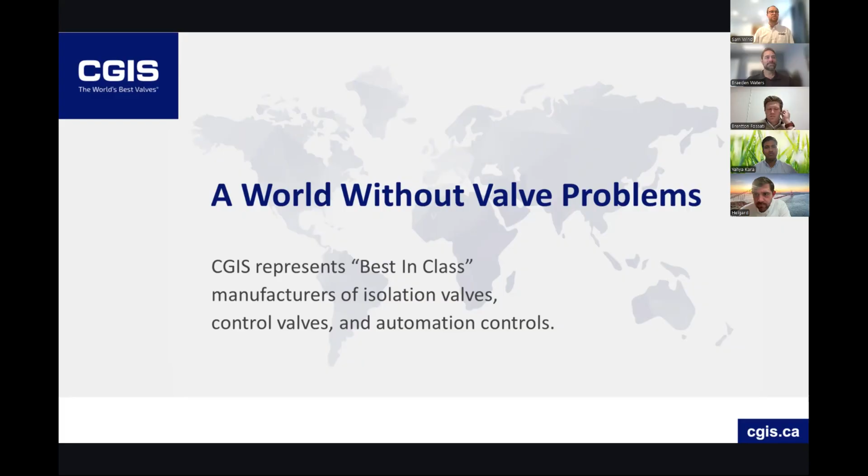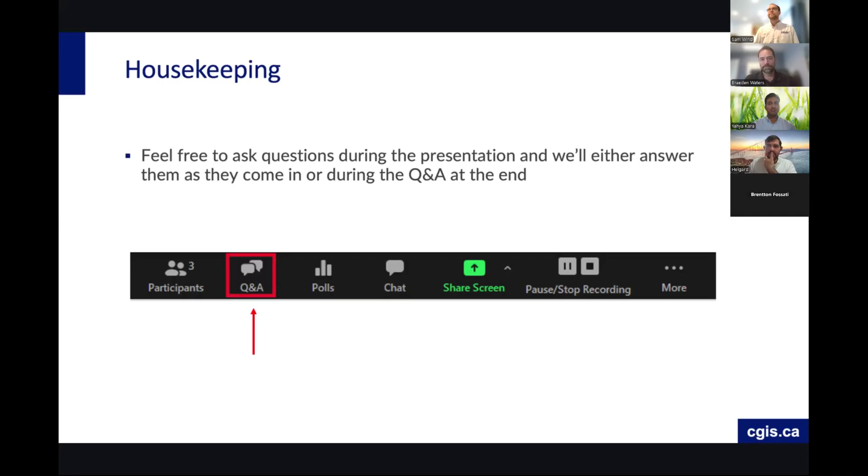Thank you very much, Sam, and good morning to everyone. First of all, to CGIS, Sam and the team, thank you for hosting this webinar. We appreciate the effort you put into arranging this, and we hope we can bring value to the table. Over the next 30 to 35 minutes, I want to talk about something that has quietly changed underneath our industry, which great many operations are still managing with the assumption of the late 90s. And that's water - not water as a utility, not water as a line item buried in the site services budget, but water as a thing that increasingly determines whether you can expand, whether you can operate, and in some regions, whether you keep your license. As mentioned, I am Brenton Fusati, and I'm the CEO of our African operations.

Let me be upfront about what this session is and isn't. It isn't a product pitch for the first 20-odd minutes. It is an honest look at 5 challenges that show up on almost every site we walk onto. Then, yes, we'll look at some of the solutions we've built to address them, and I'll show you real installations with real numbers. If my diagnosis sounds like your plant, we should talk. If it doesn't, hopefully you leave with a framework worth using.

So if we look at what we've prepared, we start with the landscape - what's actually shifted. Then the water reality: 5 challenges in order - water scarcity, tailings recovery, clarifier bottlenecks, rising treatment costs, and changes in regulation. Something people avoid discussing: what happens when you don't address these - the risk of inaction. And then the shift in how to think about water, the technologies, and a case study. We close with a call to action - what does that mean for the future?

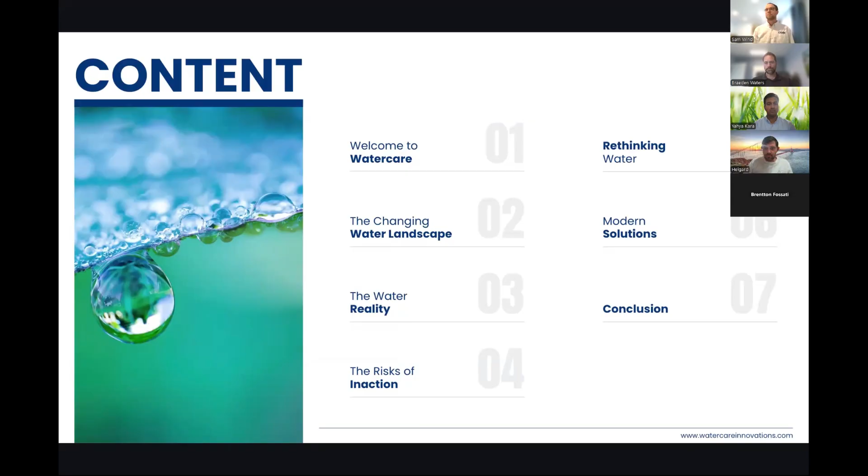So welcome to WaterCare, your comprehensive water treatment solutions provider.

Briefly, who are we? WaterCare Innovations started as a South African company with a dream just to solve the mining challenges faced in our local environment. We design, build, and operate water treatment systems throughout Africa, and recently we've expanded into the US market and now are trying to break into the Canadian market.

Our systems are primarily developed for the mining and heavy industry. We're not a chemical supplier who also sells equipment, and we're not an equipment supplier who also sells chemicals. We integrate the whole value chain, from agitation in the dam through degritting, clarification, and dosing of the right chemicals, and making sure the water chemistry is fit for the solution provided and developed, to dewatering and waste handling.

Our position is not just about water, it's about people. It's about the planet and it's about purpose. That reads like a poster. Here's what it means operationally.

When we walk a site, we're not looking for where to sell a clarifier. We're looking at where your water goes, what it costs you at every stage, and where it's constraining you. Sometimes the answer is equipment. Sometimes the answer is that you're dosing chemicals at a problem that is fundamentally hydraulic, and no amount of flocculant will fix that. That's the lens for everything that follows.

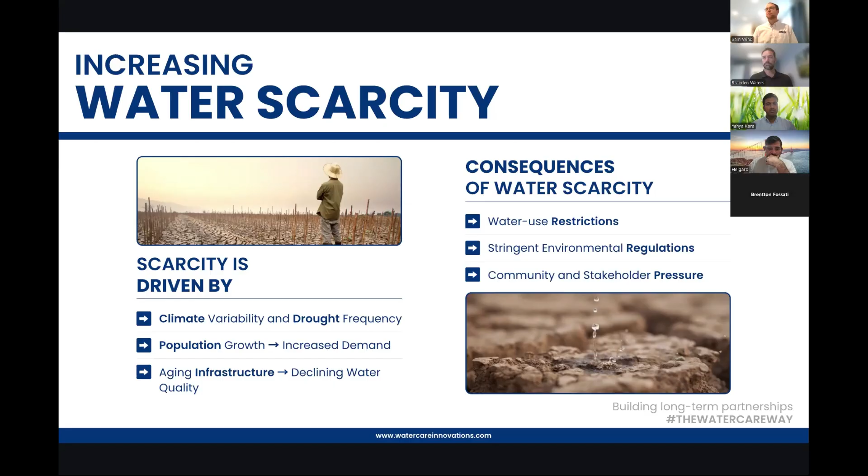The water reality. What are the key water challenges? 5 challenges. Let's take them in order.

Water scarcity, challenge number 1. The mindset problem first. Historically, water was a readily available resource. You budgeted for it the way you budget for compressed air. It was there. The engineering question was how to get it out of your process safely and cheaply.

The realization, and for many operations that has been genuinely uncomfortable, is that water is a finite resource in a specific catchment with a specific allocation contested by specific other users. Demand continues to rise. Supply is less predictable. And here's the line I'd ask you to sit with.

Water is not guaranteed. Many mining and industrial sites today operate in water-stressed regions, sites that were not water-stressed when they were commissioned. Nothing changed about the plant. The catchment changed around it. If your water strategy was designed under the old assumption, it is now a liability. And you may not have noticed, because this constraint doesn't announce itself. It shows up as a throughput ceiling nobody can explain, or a capital project that keeps getting deferred.

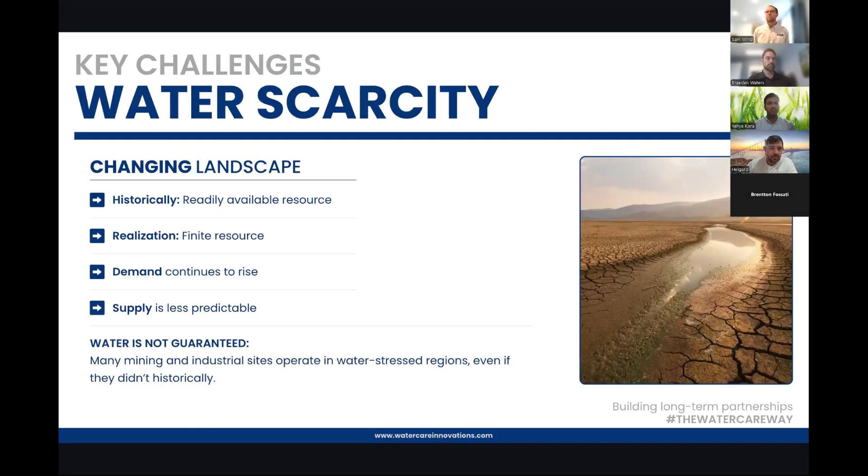Challenge 2, tailings recovery. For mining operations specifically, tailings facilities represent one of the largest opportunities for water conservation on site. Not the plant, not the wash bays, the tailings facility. And historically, that isn't how they were thought about.

Tailings management was, reasonably given the history, a storage and safety problem. The objective was containment. Water in the tailings was a stability issue to be managed, not an asset to be recovered. That has changed, and it has changed fast. The objective now: maximizing water recovery, reducing freshwater intake, reducing environmental liability, and increasing resilience during drought.

You never recover all of it. Nobody does. But the difference between a facility at the bottom of the recovery band and one near the top is not a rounding error. It is material reduction in freshwater intake, in pumping load, and in your exposure during a drought year. Which is why recovery is becoming a strategic KPI rather than merely a process metric. It's appearing on the same dashboard as recovery grade and unit costs. If it isn't on yours yet, I'd suggest that's a matter of time.

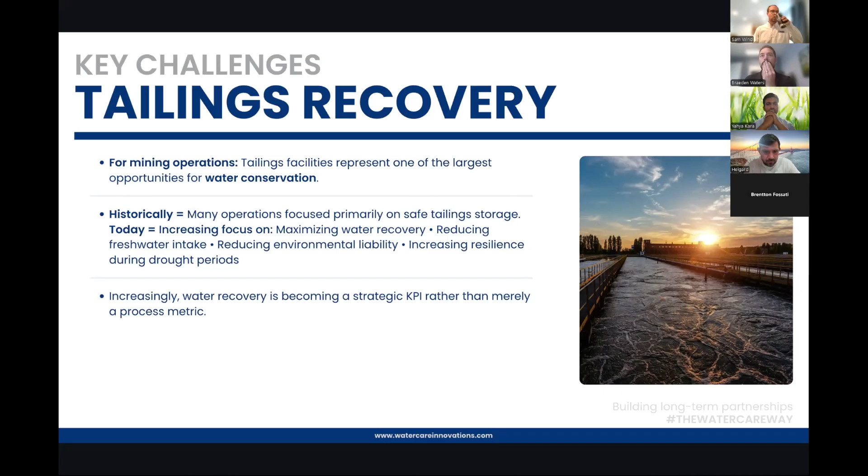Now, what are some of the clarifier bottlenecks? Aging infrastructure. Across many industries, clarifiers become hidden constraints. I use 'hidden' deliberately because a clarifier bottleneck almost never presents as a clarifier bottleneck. It presents as something else, and the something else gets treated instead.

The causes are usually one of four: hydraulic overloading, where you're pushing more flow than the settling area supports; increased solid loading from changing feed characteristics, often because the ore body changed and nobody respecified downstream; production expansion without treatment upgrades, the classic; and inadequate sludge management, where blanket depth is never properly controlled.

The symptoms: reduced throughput, poor water quality, increased chemical consumption, solids carryover, and compliance risk.

And now the pattern I want to draw out, because it's the most expensive habit in this industry: when operators see poor overflow quality, they increase the chemical dose. It's a rational response. Flocculant dose is the fastest lever available. It's on the panel, needs no shutdown, no capital request, and provides measurable improvement for a short period. But if the underlying issue is hydraulic, if your rise rate has crept above what the settling area supports...

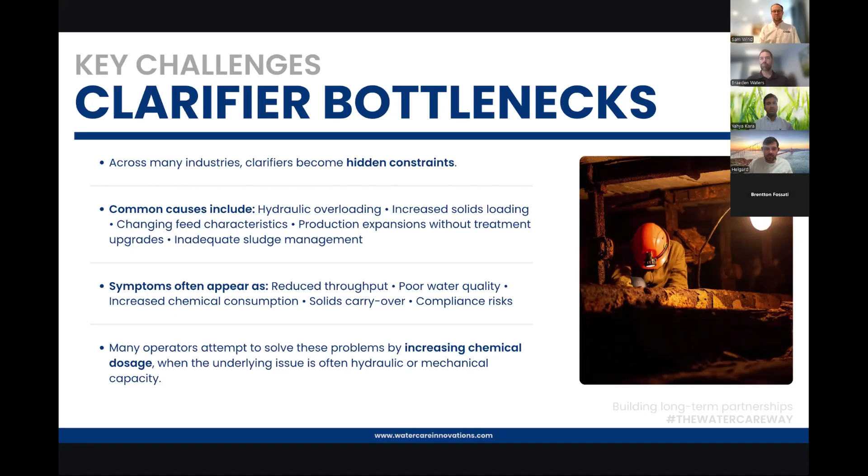Then flocculant is not treating the problem, it is masking it. You will spend more on chemicals every year. Your sludge volume will grow, your disposal cost will grow with it, and the actual constraint will still be there, undiagnosed, capping your throughput. I put it this way: many treatment challenges are capacity challenges disguised as water quality problems. We'll come back to that at the end.

The fourth challenge, and it compounds the third: costs are rising from several directions at once. Higher energy prices, rising chemical costs, more stringent discharge standards meaning more treatment per cubic meter, increased sludge management requirements, and aging infrastructure demanding more maintenance for the same performance.

That's the interesting part. This is easy: the true cost of water is no longer simply the purchase price. When a site tells me what water costs them, they usually quote an abstraction tariff. That number is real, and it's a fraction of the truth. The actual cost of a cubic meter on your site is abstraction, treatment, pumping energy, chemical usage, waste disposal, environmental compliance, plus, and nobody prices this one, the production you lose during shortages.

Most organizations underestimate their total water cost, and there is a structural reason: it is distributed across multiple departments and multiple budgets. Energy sits with the electrical engineer. Chemicals sits with metallurgy. Sludge disposal sits with environmental. Abstraction sits with site services. Production losses sit nowhere, they're absorbed as a difficult quarter.

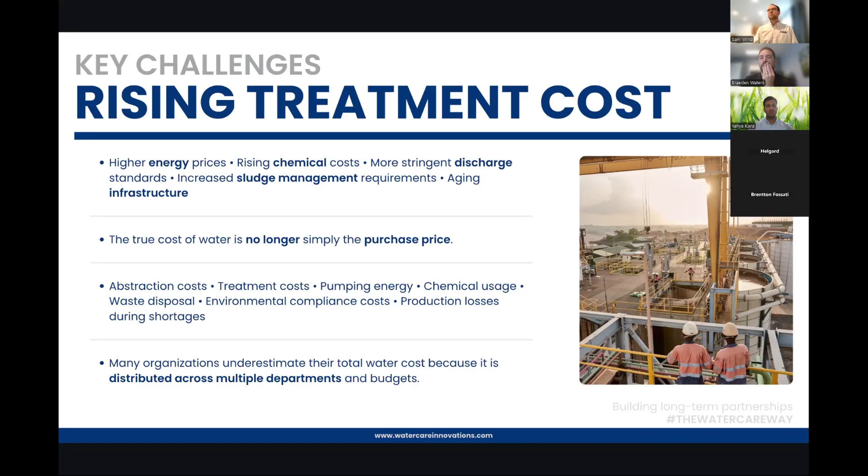No single person on your site sees the total, which means no single person has ever been able to build the business case for fixing it. If you take one action item from this webinar, take this one: get someone to add all those numbers up, not for a proposal, just to know. In our experience, the total is a multiple of what people expect. And the moment it's on one page, projects that couldn't be justified for years justify themselves.

And the fifth: regulations globally are becoming more demanding. That's neither new nor surprising. What is new is the number of parties you're accountable to. It used to be the regulator. Now it's the regulator, your investors, the community, and increasingly your customers, who have their own reporting commitments and are asking questions they never asked before.

The focus areas are consistent: discharge quality, water use license, ESG objectives, and sustainability reporting. And the consequences are not abstract: fines, production interruptions, permit restrictions, reputational damage, and community conflict.

Compliance has moved from a legal obligation to a strategic objective. It used to be a hurdle: clear the bar, get on with production. It is now a determinant of whether you get the next permit, the next expansion, the next investor.

And the industry is moving from reactive reporting to proactive accountability. Reporting what happened last quarter is table stakes. What is expected now is demonstrating that you have systems ensuring it won't happen again, and being able to show the data.

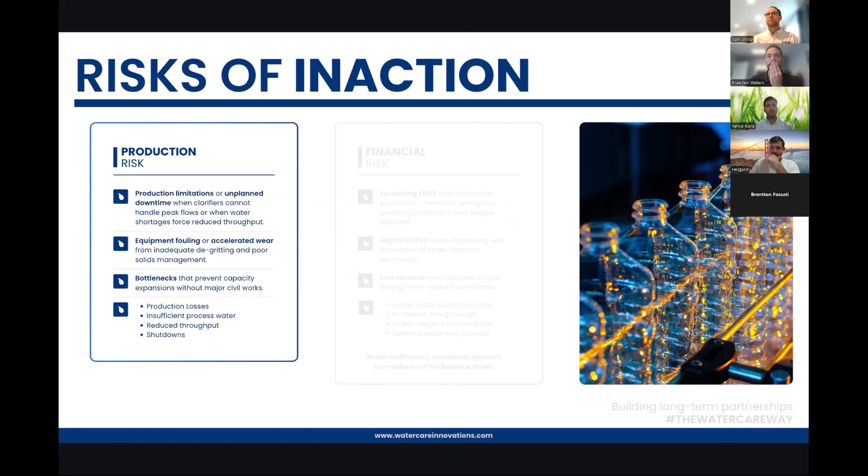So if we look at the production risk: production limitations and unplanned downtime when clarifiers can't handle peak flows, or water shortage forces reduced throughput; equipment fouling and accelerated wear from inadequate de-gritting and poor solids management; and bottlenecks that prevent capacity expansion without major civil works. That third one is the quiet one. It doesn't cost you production today, it costs you the growth you never attempted.

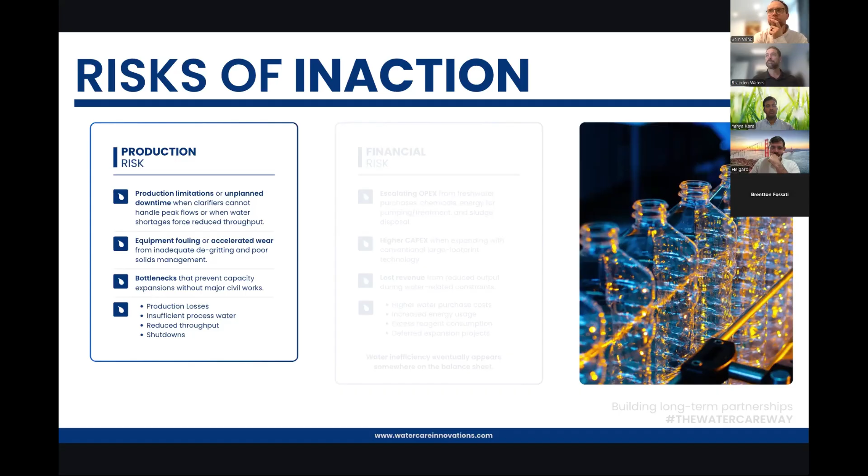Financial risk. The same story is in currency: escalating OPEX, fresh water, chemicals, pumping and treatment energy, sludge disposal, higher CapEx when you expand using conventional large footprint technology, because footprint is civil works, and civil works is where budgets go to die. Lost revenue from reduced output during water-related constraints.

Water inefficiency eventually appears somewhere on the balance sheet. The only variables are which line and how long it takes.

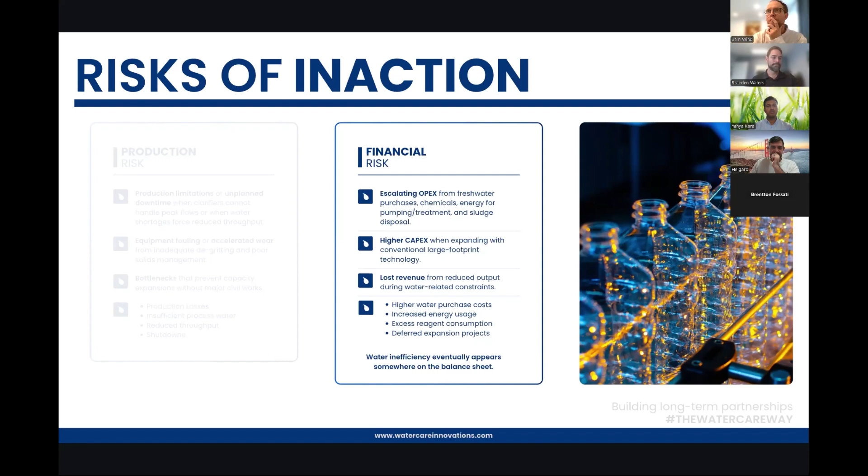Environmental risk. Non-compliance means fines, shutdowns, reputational damages, permit challenges, environmental incidents. The requirement for transparency and reporting only increases. And the structural point at the bottom: water risk is increasingly a board-level issue. It is being asked about in board packs, which means the person who owns the answer may no longer be the person who owns the plant.

Sustainability risk: investor pressure, ESG expectations, water stewardship requirements. Communities and stakeholders are far more aware of industrial water use than a decade ago and far better equipped to act on it. Water stewardship directly impacts your license to operate, not metaphorically, literally.

So here's the question on the slide, and I'd like you to answer it for yourselves. Is water currently supporting your growth strategy or limiting it?

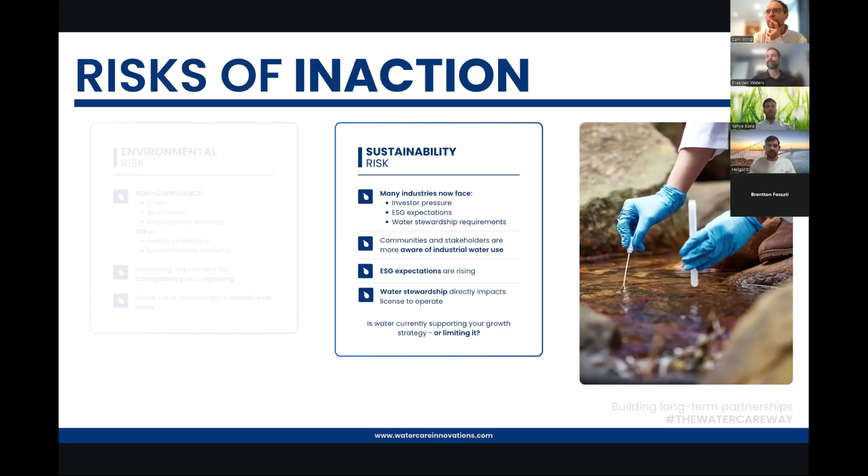Run to failure is a legitimate maintenance strategy for some assets. It is a dangerous one for water systems, because when a water system fails, it doesn't fail alone. It takes production with it. And sometimes it takes your discharge permit too.

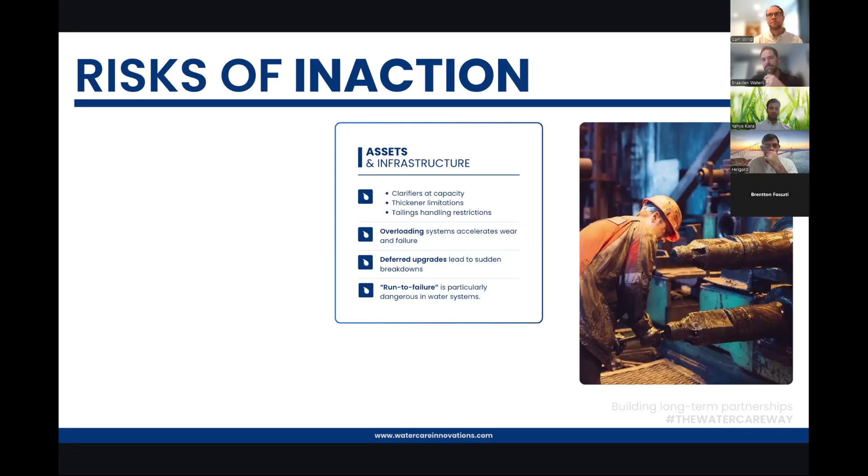If that's the diagnosis, what's the response? Two things: a shift in mindset and a set of practical first steps. Neither requires you to buy anything.

Shift one: water recovery rather than water disposal. The old mindset asks, how do we remove water from the process? The new one asks, how do we keep water in the process? Same plant, same equipment, and an entirely different set of engineering questions. Once your objective is retention rather than removal, every unit operation gets evaluated differently.

Shift two: treatment infrastructure as a production asset. Water systems get classified as utilities, ancillary equipment, they're maintained accordingly, funded accordingly, specified accordingly. But if your clarifier caps throughput, and on many sites it does, then your clarifier is not a utility.

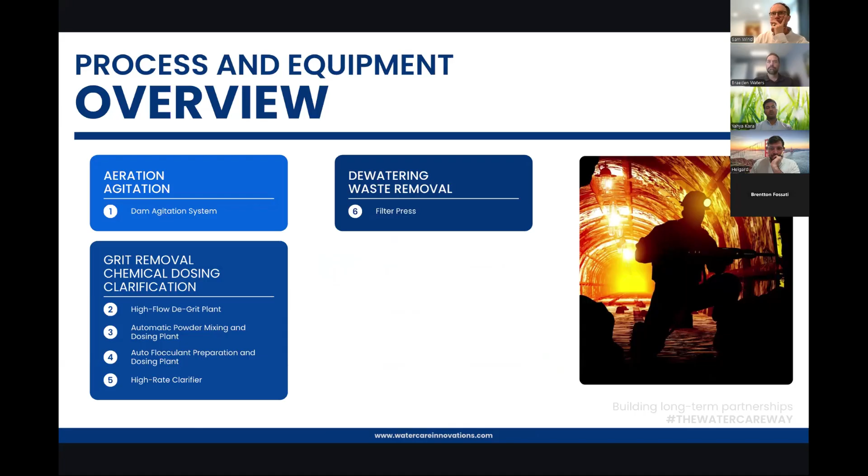In our integrated chain, I want to show it before we look at the parts, because the value isn't in any single unit, it's in the integration. Six functions, six pieces of equipment: aeration and agitation, the dam agitation system, grit removal, chemical dosing, and clarification, the high flow degrit plant, and then we have two automated chemical dosing plants, one for pH correction and one for flocculant dosing, the high rate clarifier, and then the dewatering and waste removal, the filter press.

We present them together because we very rarely find a site where only one of them is the answer. A clarifier fed by ungritted water fails early. A filter press fed by an underperforming clarifier runs badly, and water treatment processes across your site are interconnected. You cannot optimize one and ignore the rest.

Here's how it fits together. Dirty feed water enters. It passes through the degritting unit, pulling out the abrasive inorganic fraction, anything above 95 microns in cut size, and discharges it as a dry stackable grit. The degritted stream is chemically dosed, pH corrected, and flocculated before it enters the high rate clarifier.

Now, our clarifier needs to have the water chemistry corrected prior to entering. So the clarifier acts as a settling vessel, and water chemistry dictates settling performance. So our clarifier can perform up to 132 foot per hour on rise rates, which is roughly 40 meters per hour. And that is dependent on feed water characteristics. Solid load, do we have to precipitate the heavy metals, water chemistry driven factors.

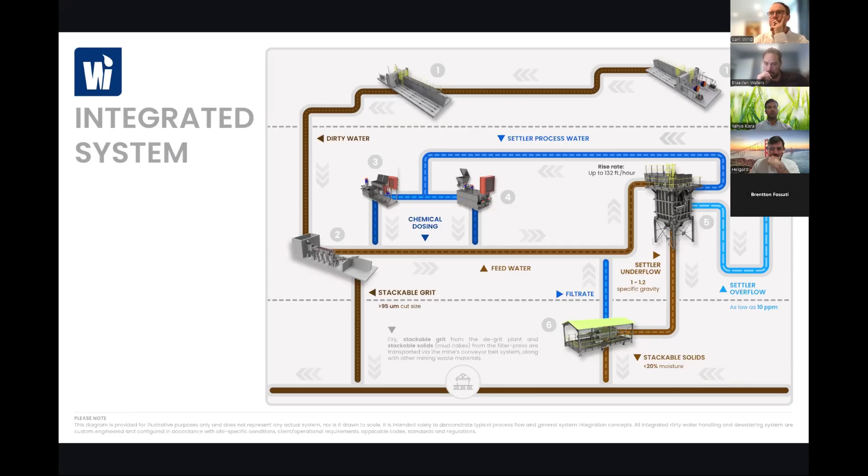If we look in more detail at each one of these process blocks, the dam agitation system keeps settled solids in suspension within your water storage, maintaining a homogeneous slurry. No sedimentation building on the dam floor. The dam's operational capacity stays what it was designed to be, rather than declining a percent a year as solids accumulate. It substantially reduces manual dam cleaning and the need for mucking. This is a safety intervention as much as a process one.

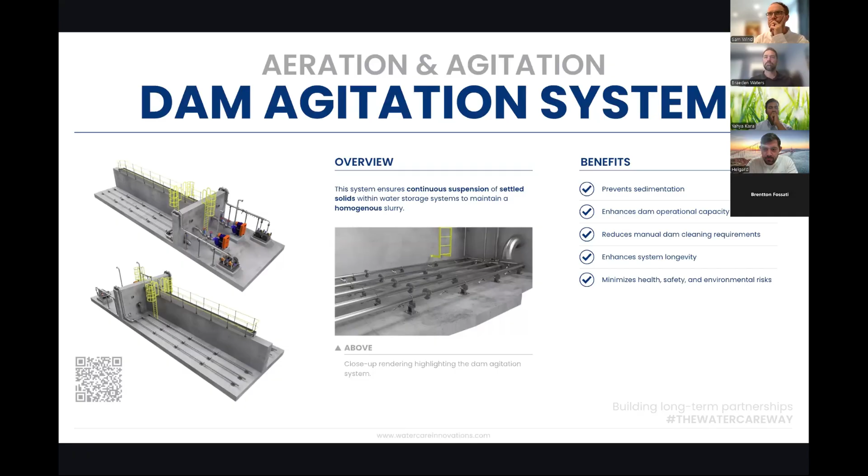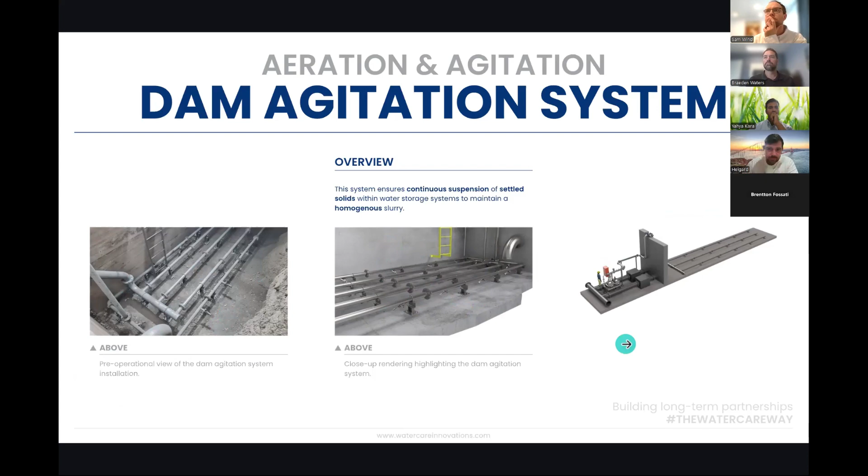So if we look at some of our installations, the middle rendering, that was our 3D model, and to the left, that is a physical installation completed on site. The high flow degrit plants. So this is the separation of dense abrasive inorganics, sand, silt, gravel from process water at high flow rates.

So we start with the stilling box. We allow multiple sources through the hydraulic separator, which is the first part in the treatment step, where we slow down the particle velocity before we mechanically remove it with the screw. It falls, drops down onto the floor and can be removed with the front end loader.

Unglamorous, and in our experience, it returns disproportionately to its costs because it's protecting assets worth many times what it costs. So here we're talking about every pump, valve, impeller downstream between your degrit plant and your discharge point that is being eroded by particles you could have removed. Underflow or mud handling becomes simpler because there's no chance of it choking up your underflow.

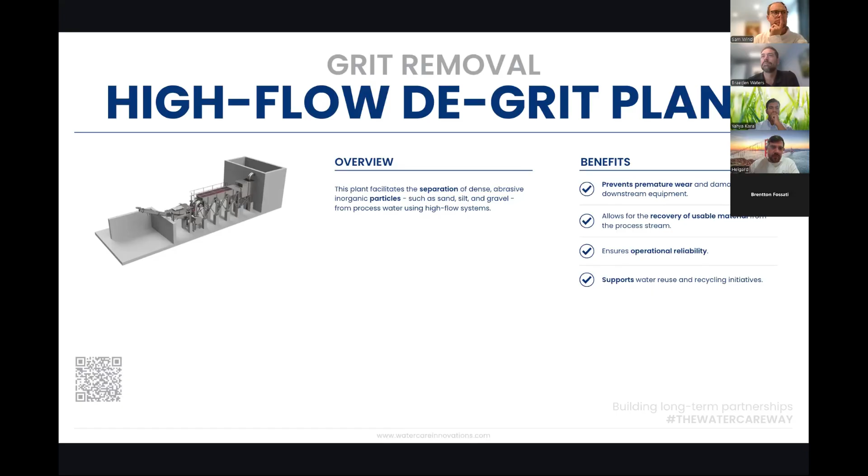Then if we look at our automated dosing plants, this typically would be an automated lime dosing tank where we just want to do pH correction for acid mine drainage water. Water's coming in at a pH of 2 to neutral or slightly higher, basic pH, to aid in base metal precipitation, and then our flocculant dosing plant.

So this takes a powder flocculant, allows the right hydration time in each one of the chambers. So this is an H240, so this will have 2 hydration chambers, and then the last chamber will be the dosing chamber. This allows proportional control based on flow.

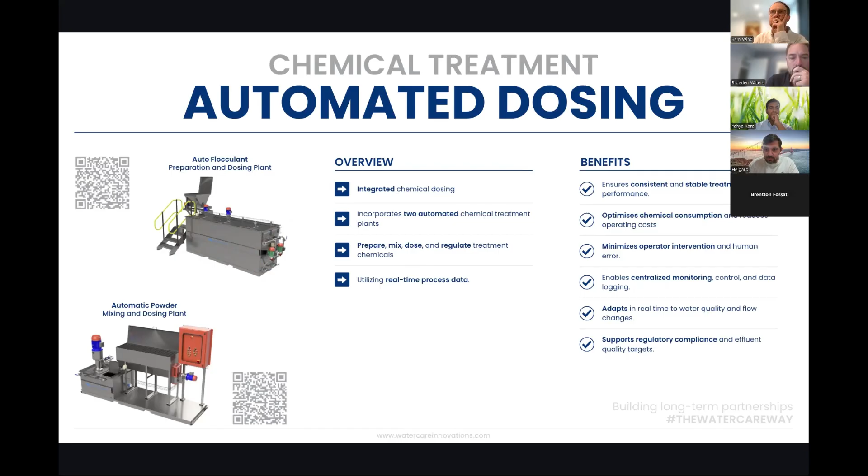And then we move into the centerpiece of our range, our high rate clarifier. Now, the clarifier, as I mentioned, has rise rates up to 40 meters an hour. That is dependent on the feed water chemistry, but in this clarifier, there's no moving parts. We've optimized the active area utilized within the settler to increase these rise rates.

Now, we do not have any mudbed dependence. So typically conventional clarifiers have that mudbed dependence, not too low, not too high, where ours, we want to keep that mudbed as low as possible.

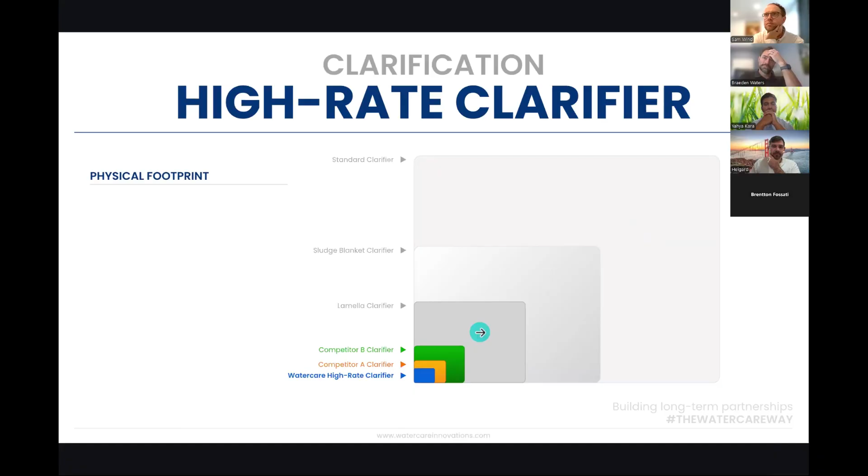This is just a graphical footprint on where ours would fit in compared to what is available in the market. So, the standard clarifier going down to the sludge blanket, lamellas, and then the sand ballasted clarifiers.

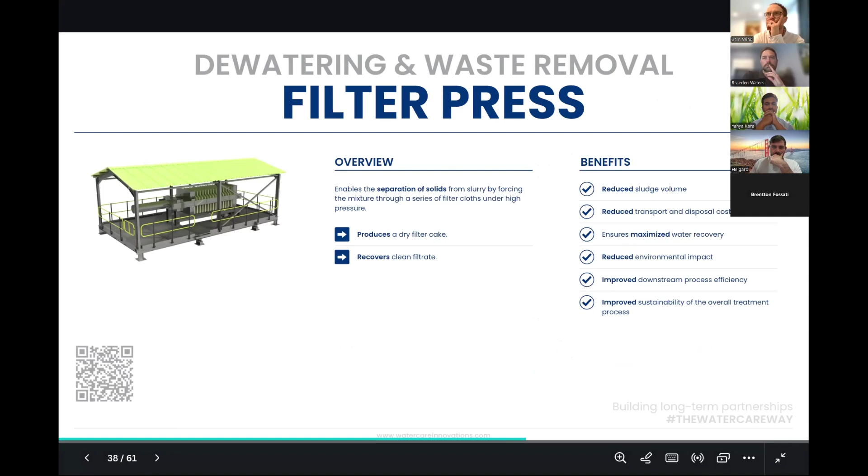And then lastly, our filter press. So from the underflow, we'll go into an agitated mud tank. We'll feed that through our filter press, and we'll produce a filter cake of roughly 20%. There's multiple filter presses out in the market. There's nothing special about ours other than integrating within our battery limits. This is the typical cake that we produce from our systems.

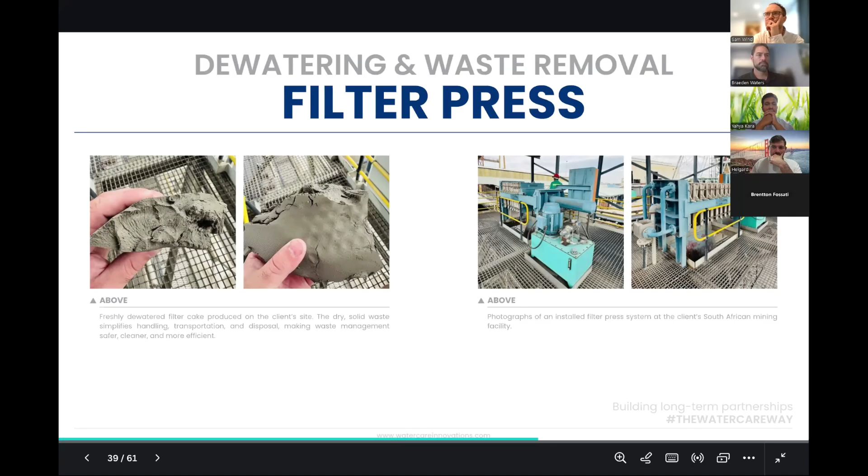And then I want to take you through a case study. Now, this was a plant where phase 1 was designed and implemented within a 3-month window. It was acid mine drainage that spilled on the back end of an old operating mine. And that caused downstream environmental problems into a nature reserve. And we noticed some challenges in the nature reserve with animals and what happened there.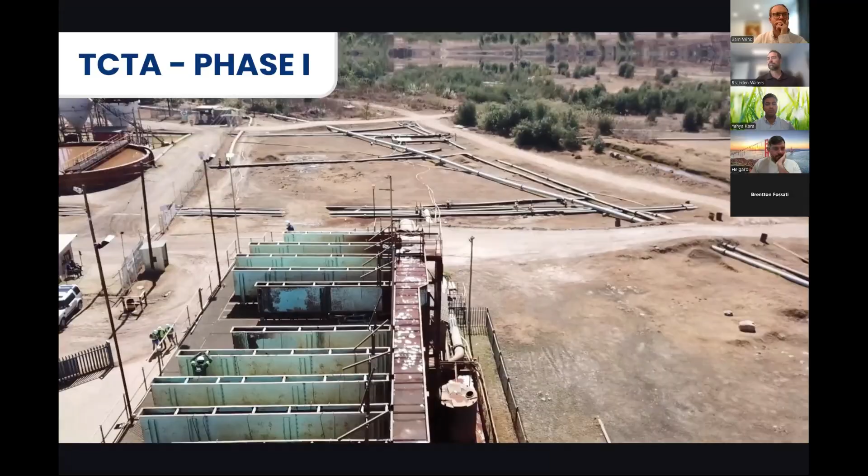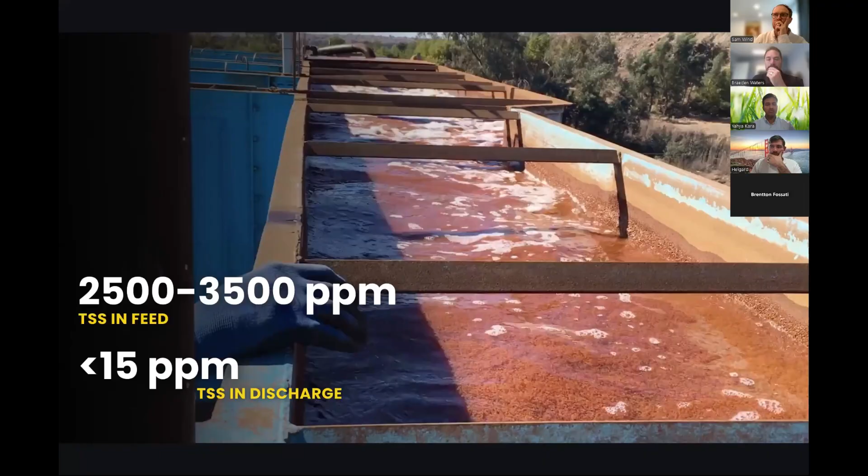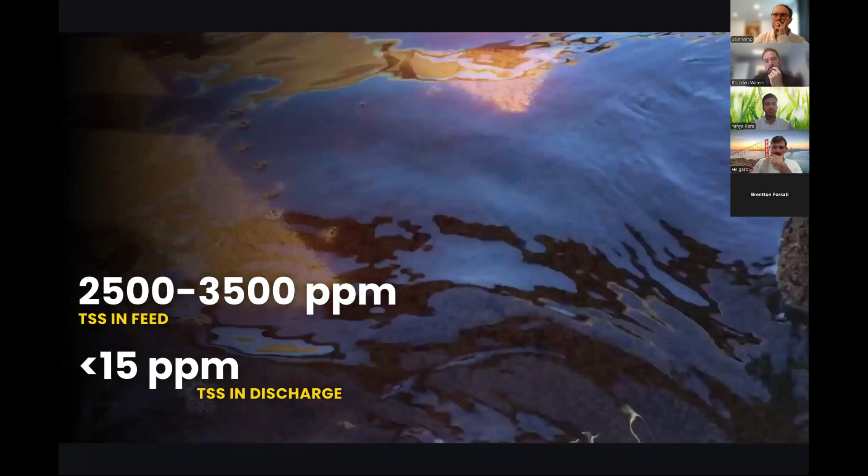Now, this water contains risk elements, iron, manganese, sulfates, uranium, nickel. Our feed varies somewhere between 2,500 to 3,500 ppm. And in our launder, this water has been pH corrected to 9.5, 9.8. We have flocculated at 1 ppm, and then we produce overflow quality of less than 15 ppm in the overflow.

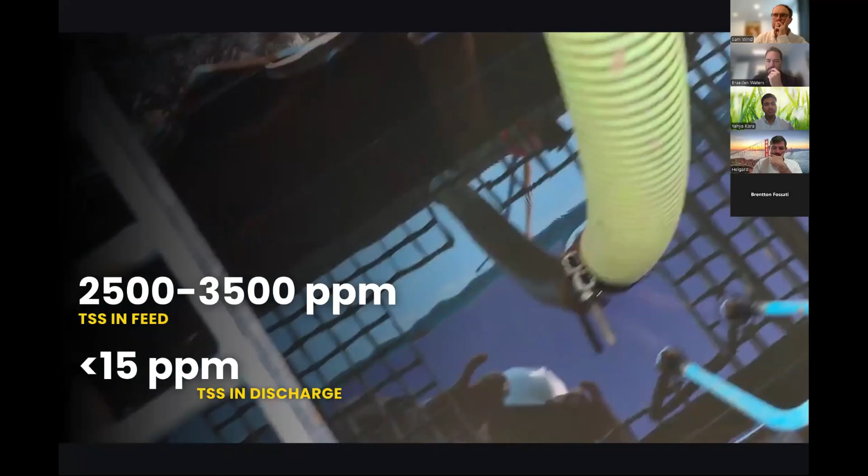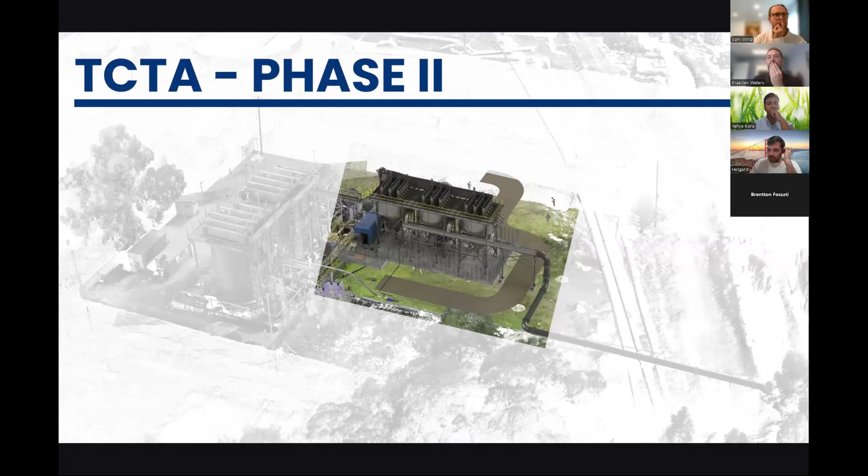This was phase 1, commissioned in 2016, and in the end of 2025, we added phase 2. So phase 2 added 360 liters of treatment capacity, and the total treatment capacity now sits at around 2,800 cubic meters an hour. It's roughly 65 megaliters a day. This is what the phase 2 installation looked like, and we just added 3 of our modular HRS 120s.

So what did this mean? So from a CapEx point of view, if we had to sell this on an outright purchase, that full 65 megaliters a day would cost in the vicinity of 5.6 million Canadian dollars, with an operating cost of just under $1 per cubic meter produced. And that is chemical supplied, labor for the operation, cloud SCADA integration, and keeping the plant in as-built condition.

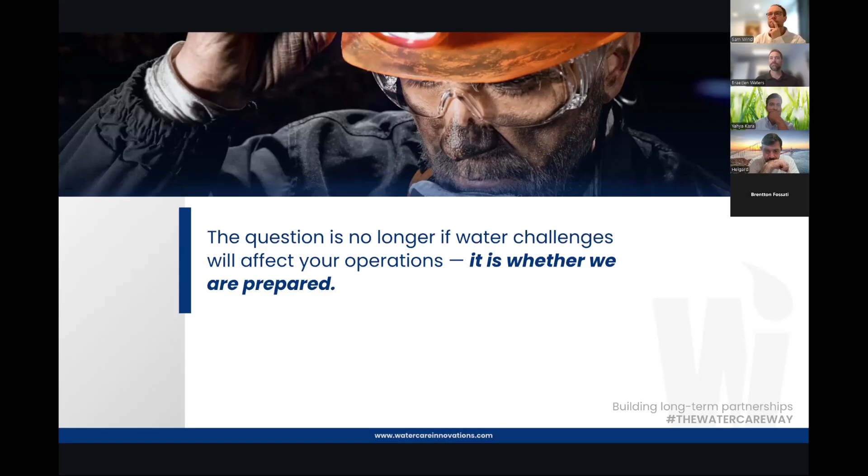So the question no longer is if water challenges will affect your operations. It's whether we are prepared. If we look at some of the industry lessons, many treatment challenges are capacity challenges disguised as water quality problems. I said this earlier and I'm saying it again deliberately, because if you diagnose it wrong, you will spend money for years and never fix it.

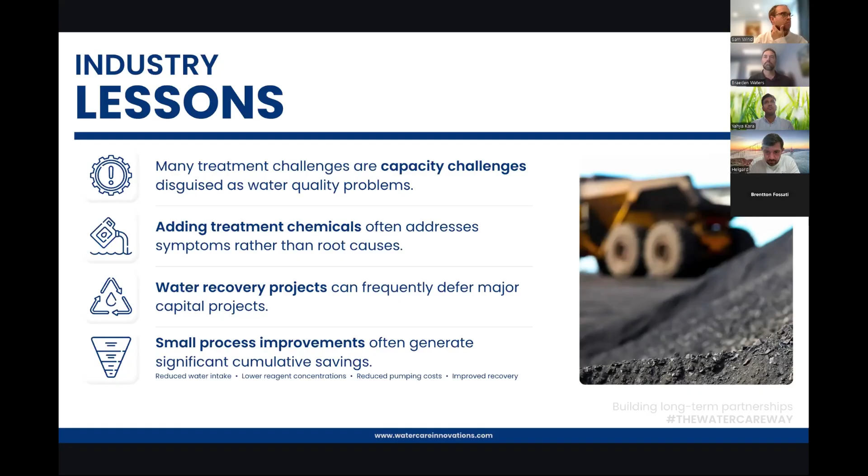Adding treatment chemicals often addresses symptoms rather than root causes. Chemistry is the fastest lever and the most expensive habit. Water recovery projects can frequently defer major capital projects. Recovering more of the water you already have is usually cheaper than sourcing more, and far cheaper than the infrastructure to bring it in. Small process improvements generate significant cumulative savings. Reduced water intake plus lower reagent concentrations, plus reduced pumping costs, improves recovery. No single one justifies a project. Together, they routinely do.

A few key takeaways. 1, water is now a strategic operational asset, not a utility, not an overhead. 2, your water treatment processes are interconnected. You cannot optimize the clarifier and ignore the grid. 3, recovery is often more valuable than treatment alone. The cheapest cubic meter is the one you already have. Modern technology enables higher performance with a smaller footprint, 5 times at equal throughput.

And I'd underline this one. The best projects begin with understanding your water, not with selecting equipment. We sell equipment, and I'm telling you, don't start there. Start with the audit. If the audit says you don't need us, that is a good outcome, and you'll have spent very little to find out.

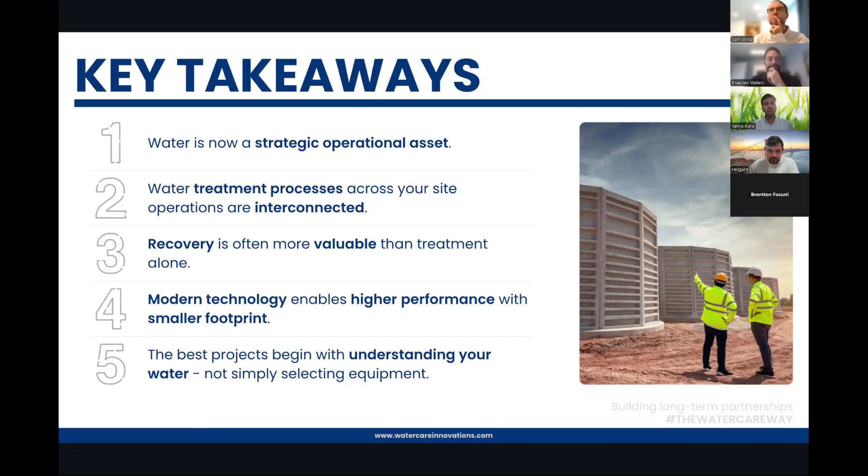Let me bring this together. Global water challenges are increasing and becoming more complex. That will not reverse, but they can be addressed proactively, deliberately, and profitably. The future is not treating more water, it's managing water smarter. The industry leaders of the next decade will not be the operations with the greatest access to water. They will be the operations that use what they have most effectively.

Six words: scarcity, recovery, reuse, efficiency, cost control, and compliance. Strategic water management builds operations that are resilient, sustainable, and competitive.

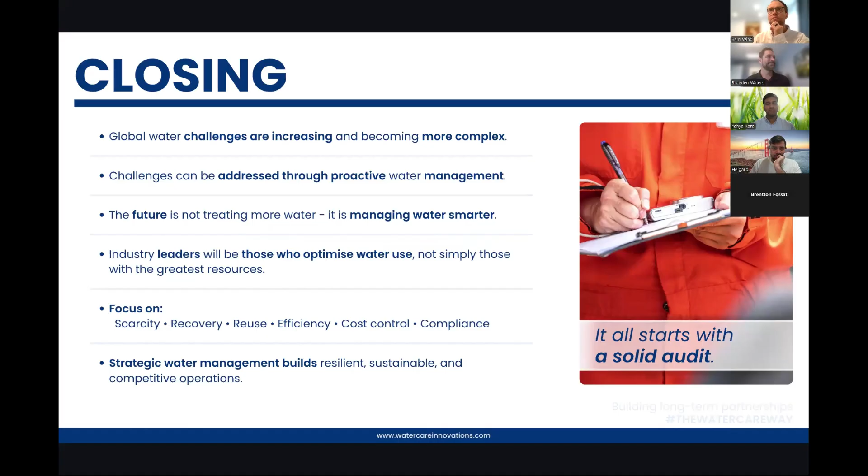The first one that came in was, what type of clarifier technology do you use, inclined plate or other? And also, how does this translate to a chemical process such as bitumen froth flotation instead of water treatment?

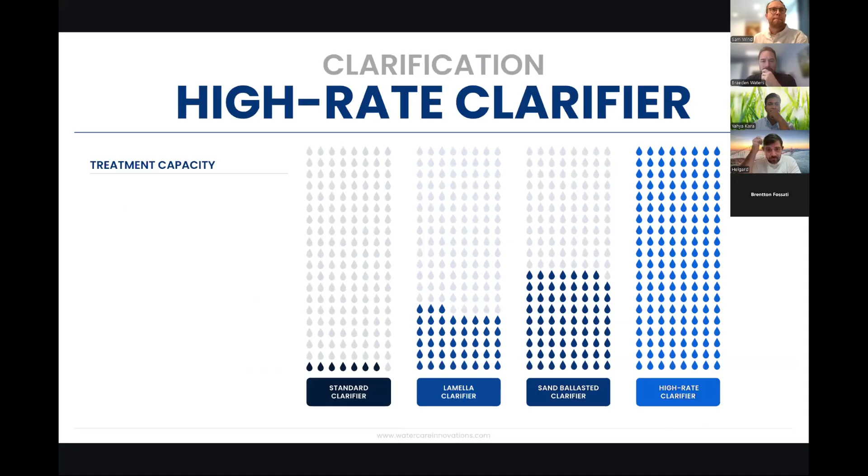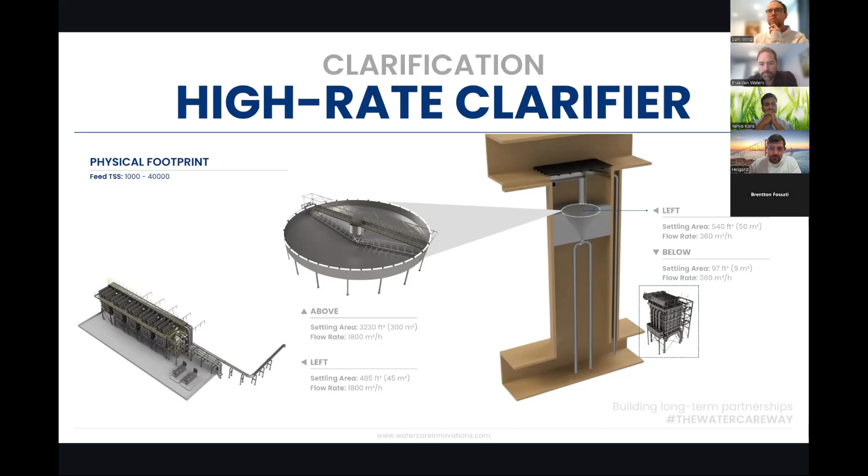So to answer the first question, what type of clarifier we use, this is the internally designed and developed WaterCare high rate clarifier. We've registered a patent on this. It uses the outside vessel, as you can see, as the larger scale, and then we have reactors on the inside, and that's where our technology sits, where we've optimized collision and angles of these particles to aid in settling of the particles and achieve solid liquid separation.

Perfect. And then the follow-up was, how does this translate into a chemical process such as bitumen froth flotation instead of water treatment? Yeah, Rinesh, I don't know if you can maybe come in here and help me out on that one. In terms of flotation, I know you've had some success up in the African side on our clarifier.

If Rinesh is not on the panelist list, they won't be able to speak. We can answer that in a follow-up. We've got the information from the question asker, so I'll move on to the next one.

Thanks. What is the difference between your high capacity clarifier and a lamella clarifier? So the lamella clarifier has the plates on the inside to slow down the particle velocity, and their rise rates, if I remember correctly, are around 15 meters an hour. So they have plates welded in on the side, and that forces the collisions and the velocity of the particles to be slowed down.

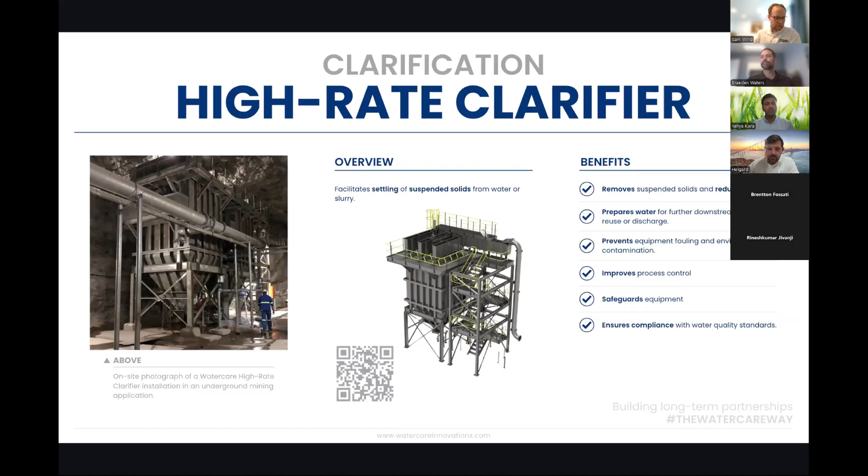Okay, perfect. He says, thanks for that. And that's looking like it's it for questions.